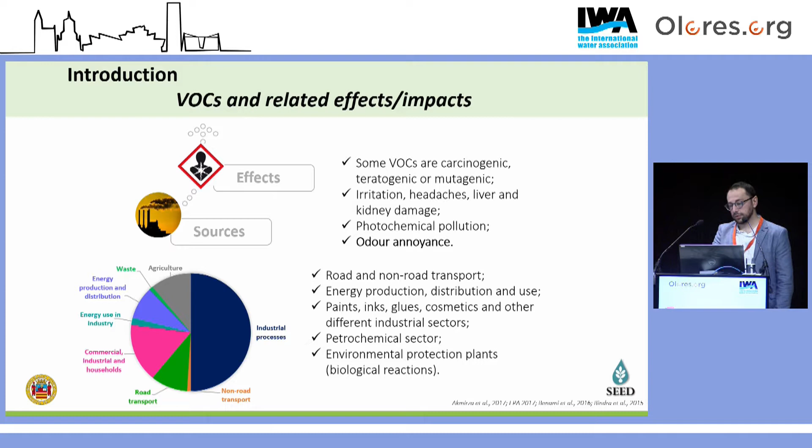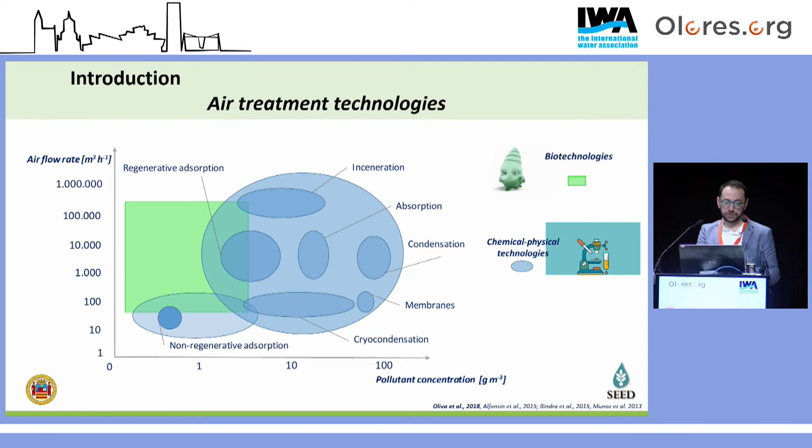We have two big families of volatile organic compounds treatment technology: chemical-physical technologies and biotechnologies. The chemical-physical technologies work within a really high range of pollutant concentration, and also within a wide range of high flow rates. On the other hand, biotechnologies work within lower pollutant concentrations and a medium range of air flow rates.

We know that physical-chemical treatments are costly, mainly because they consume a lot of energy, but also a lot of chemicals. And there are a lot of ongoing studies during the last 20, 30 years trying to push nature-based solutions to degrade this type of pollutants.

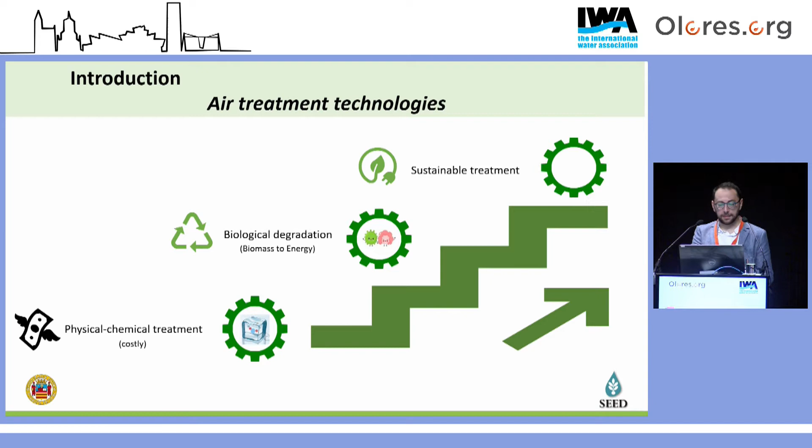The main goals of this study are to develop and evaluate an integrated technology for the abatement of volatile organic compounds with simultaneous capture of carbon dioxide, evaluate and maximize the efficiency of the proposed technology in terms of toluene abatement and carbon dioxide capture by using different nutrient sources such as urban wastewater and dairy wastewater, and assess the production of biomass to evaluate its potential conversion into energy to make the process more sustainable and cost-effective.

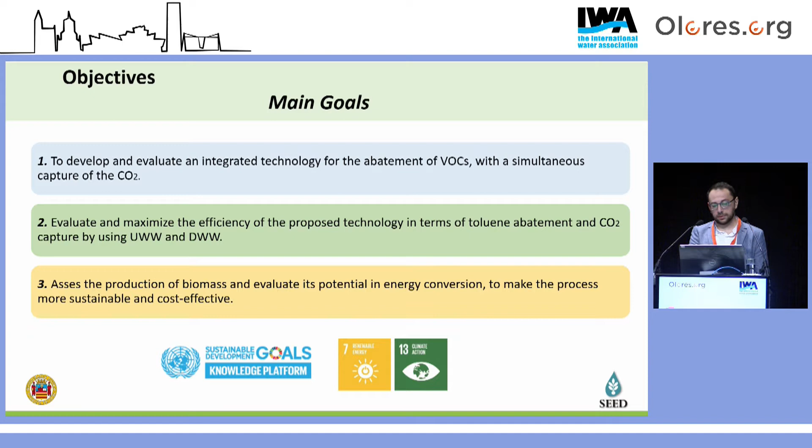These goals are also in line with the Sustainable Development Goals, the seventh goal, renewable energy, and the 13th, climate action. The research was conducted at the Sanitary Environmental Engineering Division of the University of Salerno, located in the south of Italy.

Here we can see our experimental setup, composed of two reactors. One is a moving bed bioreactor, R1, inoculated with activated sludge, with a working volume of 6.5 liters, and filled with 30% plastic carriers, the ones that we have in moving bed bioreactors in wastewater treatment plants.

The second reactor, R2, is an algal photobioreactor inoculated with microalgae, with a working volume of 26 liters, and it works with an illumination cycle of 12 hours light, 12 hours dark, using LED lights. The light intensity ranges between 6,000 and 9,000 lux.

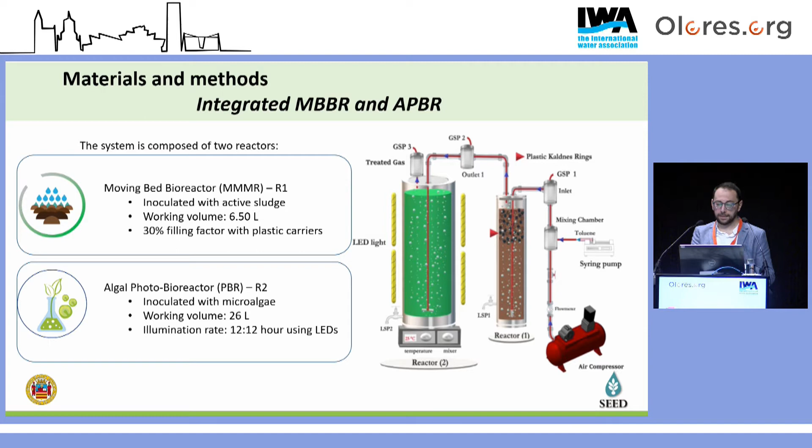We can also see the gas feeding system, composed of an air compressor and a syringe pump holding a syringe that contains pure liquid toluene, mixed in this mixing chamber. And we can see 3 different gas sampling ports. One is located at the inlet of the first reactor. The second is at the outlet of the first reactor, which is also the inlet of the second reactor. And gas sampling port 3 is at the outlet of the second reactor.

The first reactor, R1, was inoculated with activated bacteria. We took activated sludge from a wastewater treatment plant located in the south of Italy, in Battipaglia. This sludge was centrifuged, resuspended in a synthetic wastewater medium, and then inoculated in the reactor.

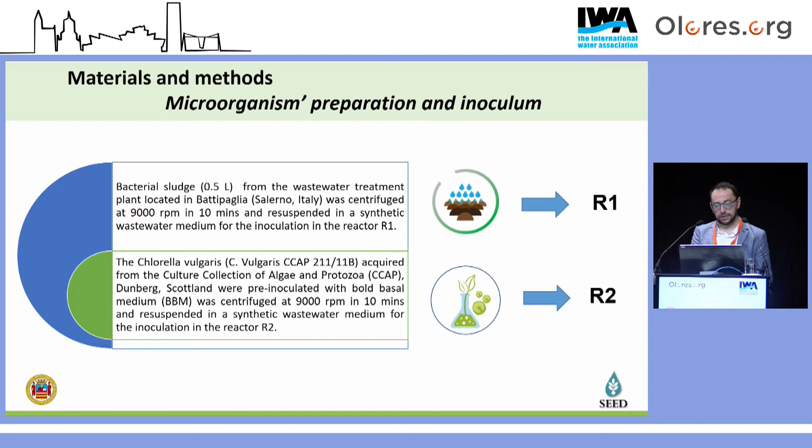In the second reactor, R2, we used Chlorella vulgaris as the microalgae strain. We pre-cultivated this strain using Bold's Basal Medium, then centrifuged it and resuspended it in a synthetic wastewater medium, which we used as the inoculum in the second reactor.

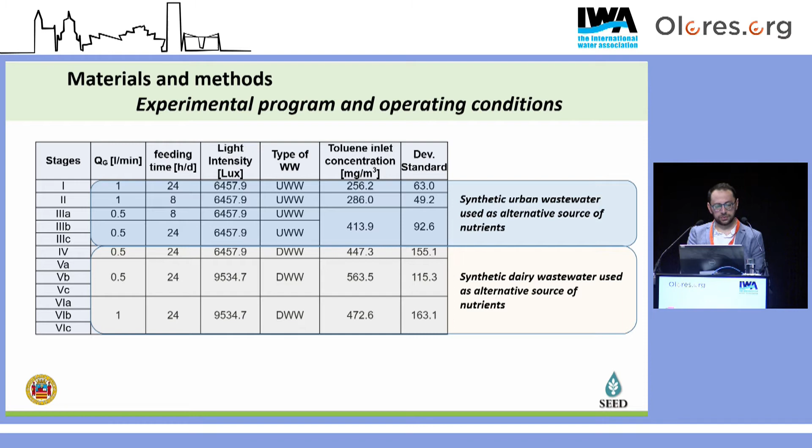Here we can see the experimental program and operating conditions. There were 6 stages. The first 3 used synthetic urban wastewater as a nutrient source. The last 3 used dairy wastewater as a nutrient source. Also, during the overall experiment, we gradually increased the toluene inlet concentration in each stage, and we also increased the light intensity up to 9,000 lux during the last 2 stages.

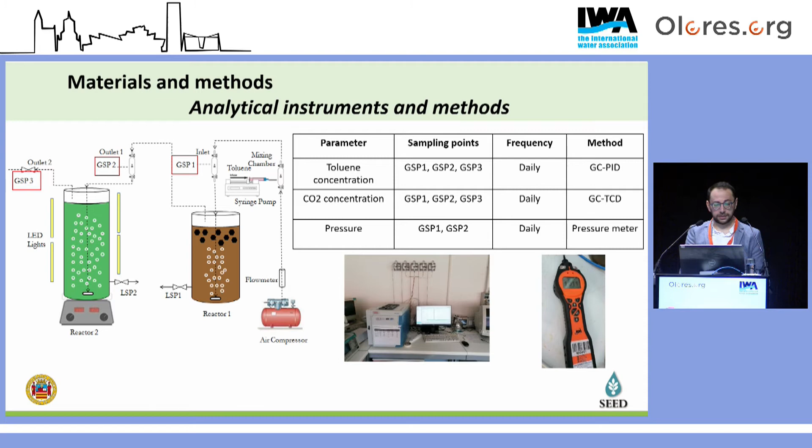Here we have basically the analytical instruments and methods that we use to characterize the gaseous phase. So we measured toluene concentration at sampling ports 1, 2, and 3. We did this measurement daily, and we used a GC-PID. Also, we measured the CO2 concentration at sampling ports 1, 2, and 3. We measured this concentration daily, and we used a GC-TCD. Also, the pressure was monitored daily with a pressure meter.

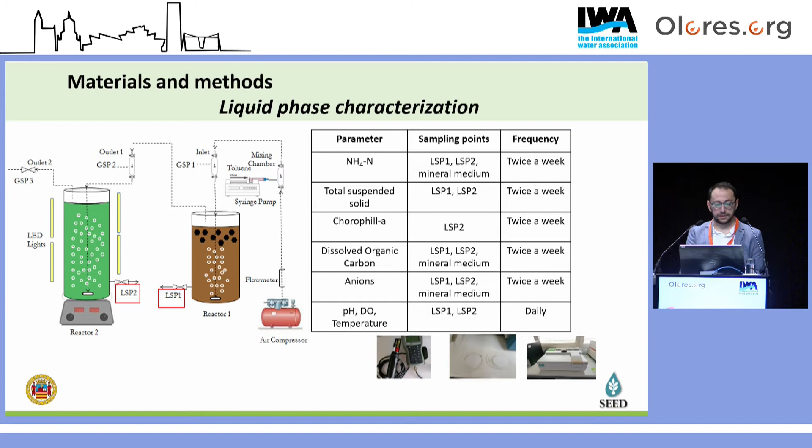Here we can see the parameters that we used to characterize the liquid phase of the 2 reactors. We measured the ammonium, the total suspended solids, chlorophyll A, dissolved organic carbon, anions, nitrate, nitrite, sulfate, twice a week. And then we measured daily pH, dissolved oxygen, and temperature.

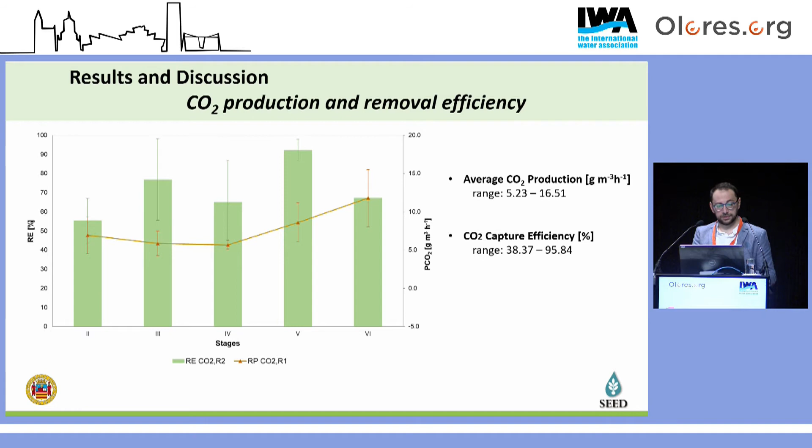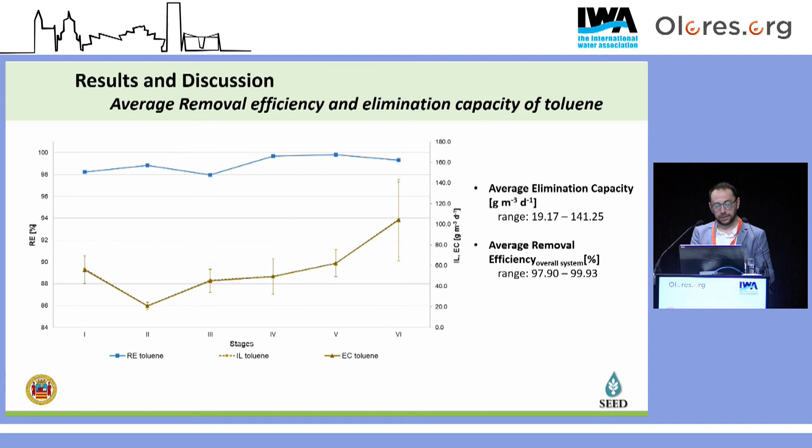And as we see, we have the results in terms of average CO2 production for the first reactor, in which there is the oxidation of organic compounds. The average production of carbon dioxide was around 5 up to 16 grams per cubic meter per hour. And the CO2 capture efficiency ranged between 38 and up to 95, 96% more or less. Also, as we see here, there is a gradual increase in the CO2 production, because, as we can see in the previous slide, we gradually increased the inlet load of toluene, and there were more oxidized compounds, so more CO2 was produced.

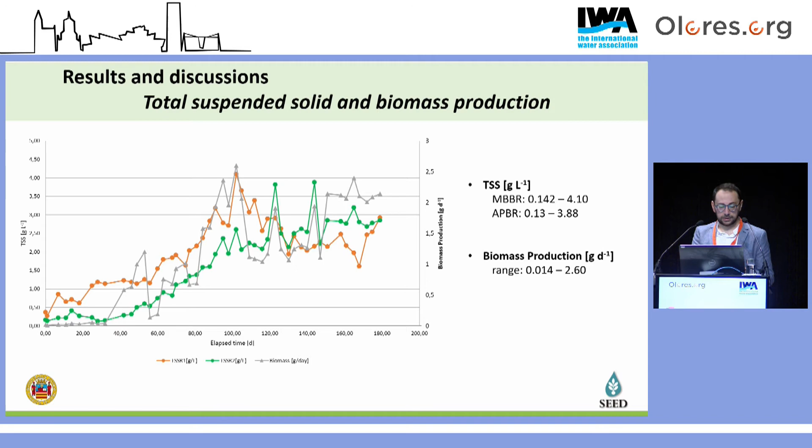Here are the results in terms of total suspended solids and biomass production during the overall time of the experiment. As we see, we reached up to 4.1 grams per liter in the moving bed bioreactor, and in the algal photobioreactor we reached up to 3.88 grams per liter. So there was quite a lot of biomass.

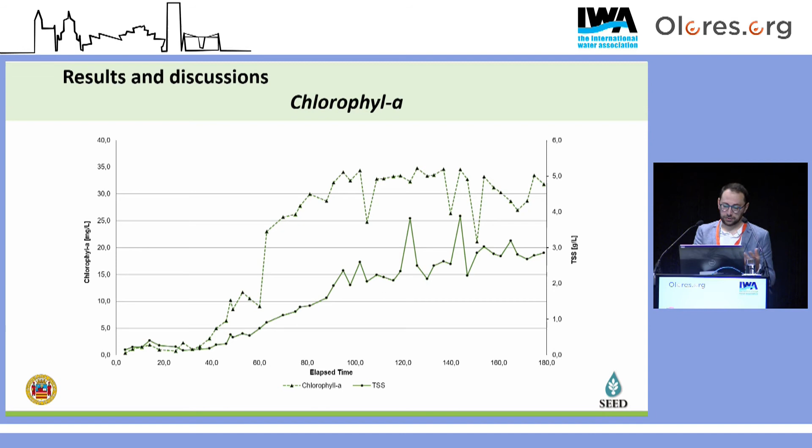And here I'm showing you the chlorophyll A. Why did we measure the chlorophyll A? Because we wanted to monitor the stress of microalgae in the second algal photobioreactor. So as we see in this slide, the algae, Chlorella vulgaris, were in, let's say, good shape. So there were no abiotic or biotic stress factors.

In conclusion, I want to say that we obtained a solvent removal efficiency up to 99% under the investigated conditions. The algal photobioreactor was able to reach a CO2 capture efficiency up to 96%. The algal photobioreactor also reached a biomass concentration of 4 grams per liter, with a biomass production up to 2 grams per day. And as we've seen, the use of alternative sources of nutrients, urban wastewater and digestate wastewater, allowed us to reduce the use of chemicals, besides promoting the production of other products such as lipids.

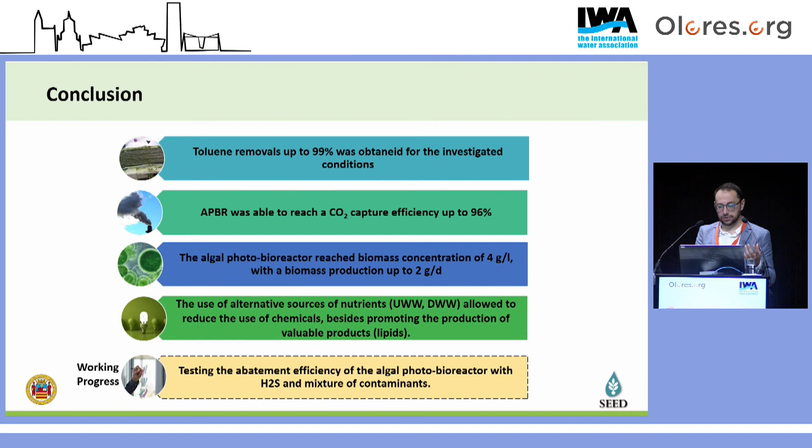In fact, now we are doing the extraction of lipids from the biomass that we collected during each stage, to evaluate the possibility of producing biodiesel from this biomass, to make the system more sustainable. And next, we want to test these reactors with a mixture of contaminants and also with hydrogen sulfide.